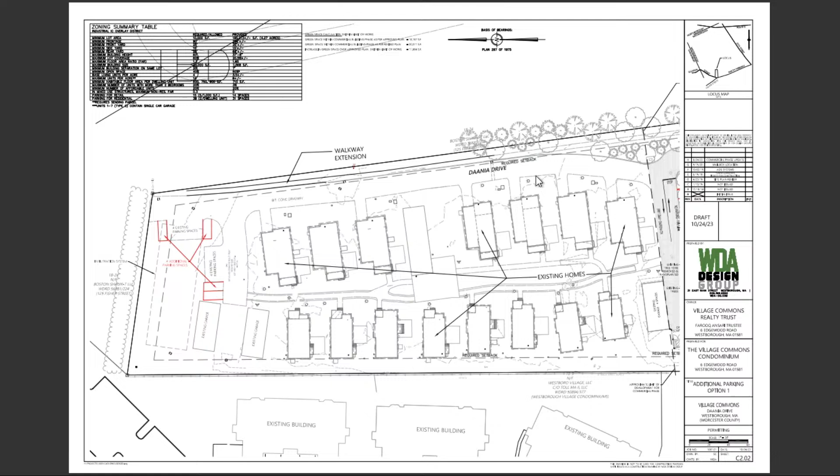And then in option 2, we can add more parking along the central green area. Here I'm showing the maximum number of parkings that we can add, so we can pick and choose if we only want to add the three towards the western edge of the green space, or we only want to add one, really depending on what the board feels right. But this is the maximum encroachment possible along the edges of the central green space.

Okay, questions from the board? Yeah, my question, out of pure curiosity, and I didn't get a ruler out or anything, but what is the distance between the parking in the front of the building, between the two sets of spaces where you've got four, and then across from that you've got four more? What is the distance in feet between those two? That should be 20 feet at minimum. So, yes, it should be. I'm just wondering. It is 20 feet.

Then you're also planning to put some trees in there? I mean, that's what the landscaping showed. So are you saying between these two spaces, the green space? So the new parking spaces, I think there's one, two, three, four, five of them right there. What's the distance between there and the four spaces there?

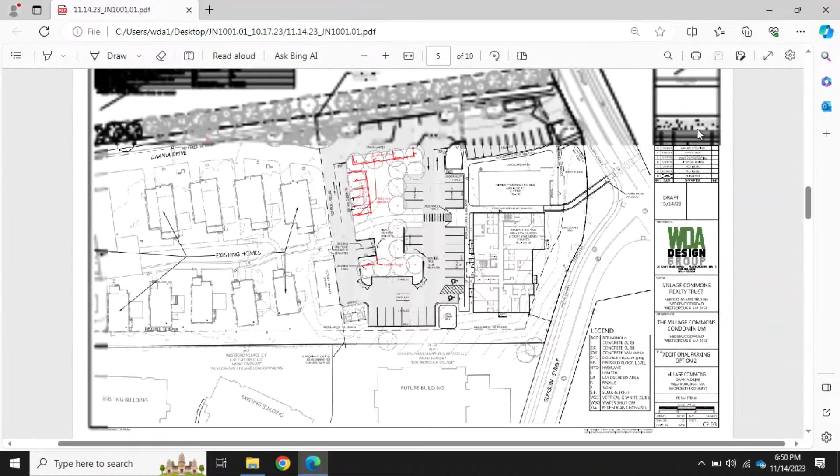I'm looking for the scale on here, and quite frankly, I was lazy and didn't take a ruler out. But I wondered what the distance was between those. Somewhere between 30 and 40 feet, I would guess. It should be around 35 feet. I think 30 to 40 should be a good guess. Right now, I don't have a scale.

Anybody know how far it is from here to the wall in the back? Is that 30 feet from here to there? That's further than 30 feet. I was just trying to visually get an idea. I believe from this wall to the entrance door it should be around 20 to 25 feet between the wall and the door of the entrance.

So between 30 and 40?

Showing off, John, you're showing off. All right, nice. Youngsters with their technological skills.

All right, so any questions? Do we have, I think we should withhold a decision on this until we hear public comments?

How many spaces are we looking to add, generally? Well, I'd like to hear public comments on how many of the existing residents would like. If the public comments say that they want to add all of these spaces, are we okay with that? Well, I don't think you can add all of them for the green space. You can only do option 1 or 2.

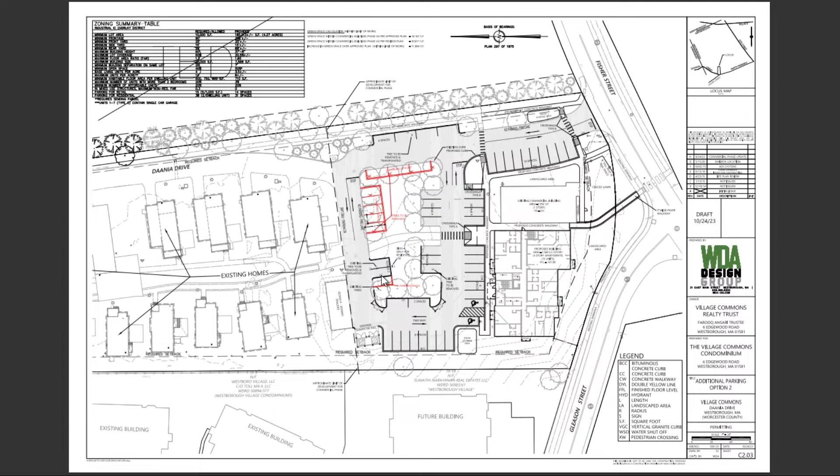If you look at that plan, you see the dumpster enclosure? You see that little dash line? It will be parallel to that on the other side of the roadway. Can you move your cursor to where the fence is gonna go? It should be on the inner side of the curb, yeah, along here, all the way up and down. Okay, all right, thank you.

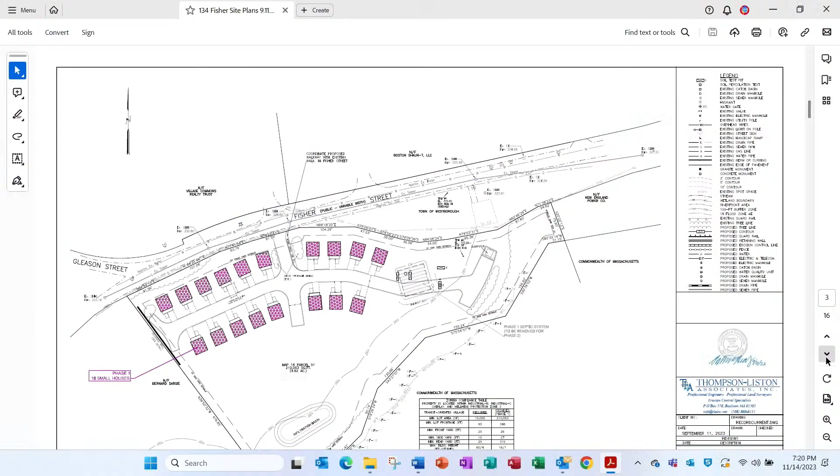If you could, Jenny, flip to the grading plan for phase 1. Each of the small houses would have a small infiltration system just to handle the roof runoff — those are the little gray areas you can see behind each building. Essentially it's the size of a 4x8 piece of plywood, but it's a number of small chambers that provide enough voids within the soil for us to contain the volume of roof runoff and let it soak into the soil. We've used it successfully on other projects and individual house lots. But because we have the sandy soil here, it's a great opportunity to maximize the amount of recharge from the clean roof runoff.

We are situating the sewer system so that we can make a gravity connection out to the town sewer main in Fisher Street in the future, without replacing what we're putting in place for the septic system. We're focusing everything down to that center spine road, and at the rear of the site the septic would be removed and replaced with a gravity line going out to Fisher Street, should sewer capacity become available in the future. The grades allow that to happen without a pump system.

Right in front of our site along Fisher Street, labeled as the Town of Westborough, there's a fenced-in area that has a sewer pump station for this quadrant of the town. The sewer coming down Fisher Street is quite deep, going into that wet well in the pump station, which leaves us the opportunity to make that connection.

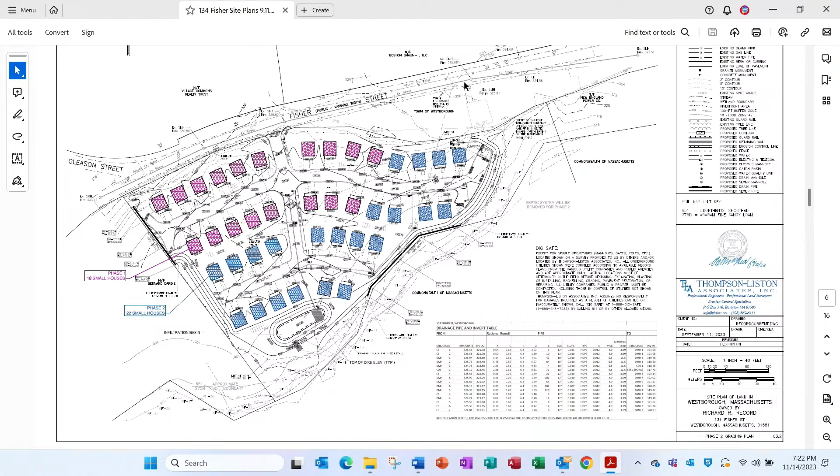The drinking water supply is proposed to connect at Fisher Street to the town water supply. There is capacity within that system as we understand it, and this is a pretty small user of water, having only one bedroom per unit — under 2,000 gallons per day. It doesn't put an extraordinary tax on the supply system. Even at build-out with 40 units, at 110 gallons per day, we're still under 5,000 gallons of water demand.

As for the electrical system, the question came up in review, and Mr. Record confirmed these roofs would be solar ready, although solar panels aren't proposed at this time. This service would be from National Grid, coming into an underground system with several transformers laid out. Because they're small users, we can get multiple houses off a single transformer — where in a single-family subdivision with 4-bedroom homes you might only serve 2 homes, here we can serve 4 or 5 homes off each transformer pretty efficiently.

As for street lighting, we're proposing that the sidewalk and spine road right as we enter from Fisher Street have a couple of street lights, but not go any further, in keeping with other single-family homes in the town. Each house would have a post light by the driveway to provide light onto the driveway and the common facility.

We had submitted a landscaping plan showing a dense planting buffer between Fisher Street and the rear of the buildings that back up to it. There are also individual street trees proposed scattered throughout, where we don't have conflicts with underground sewer, water, or electric. Some comments from Public Works asked us to shift some of these around.

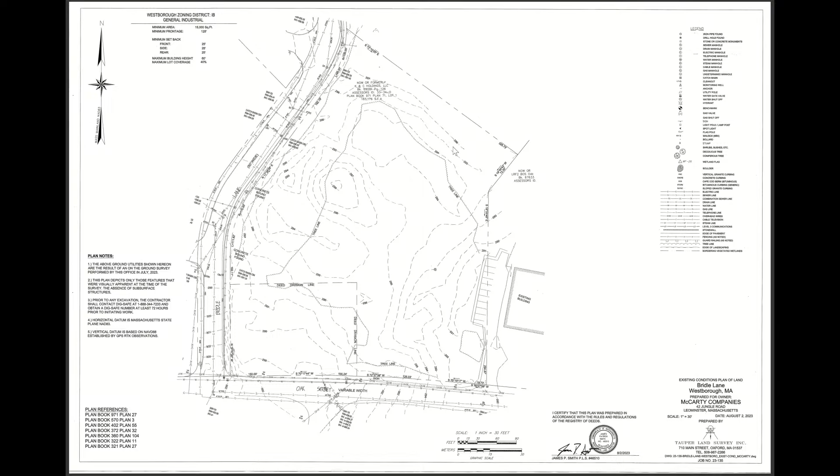We're proposing a covered canopy at the rear of the building. That canopy has a 16-foot clear height from the concrete slab below it to the lowest part of the steel, so that landscapers with trucks and trailers, fire department, and emergency vehicles can all drive underneath it in order to loop around the building.

We're proposing parking along the front of the building, with handicap spots and a couple EV-ready spots, and also an area we're going to pave with concrete rather than asphalt in case we're parking any of the larger equipment that Mr. Satterfield sells at the front of the building. There are 14 spaces along the side for staff, as well as some company vehicle parking there.

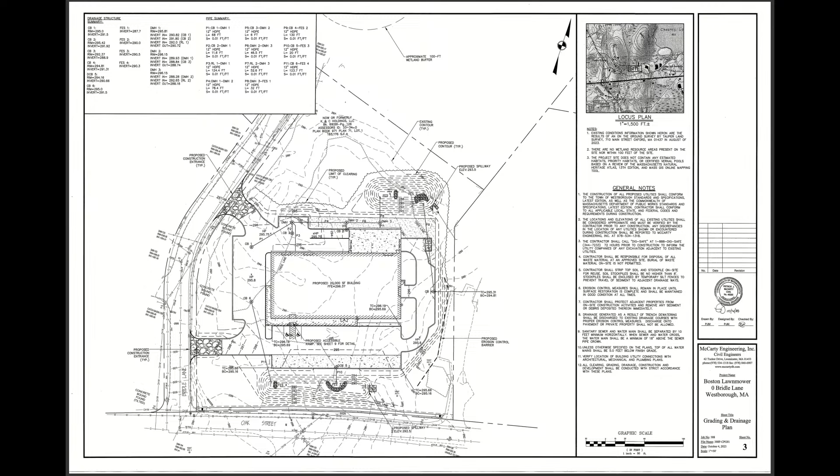The grading and drainage plan is pretty straightforward. We did soil testing, and not surprisingly, there's really nice gravel at the site. So we have a detention basin at the rear of the site that picks up the back half of the parking area and the roof runoff, and then another one at the front of the site that picks up the front half of the parking lot.

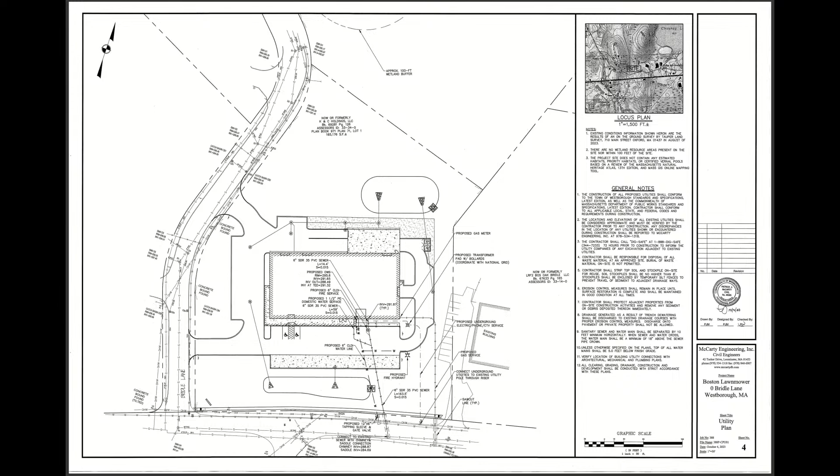The utility plan is pretty straightforward: underground electric to a transformer into the building, municipal water and sewer. There will be an oil water separator on the sewer so that any floor washing that gets into the floor drains of the service area goes through that oil water separator before discharging to the Westborough sewer system, and then underground gas.

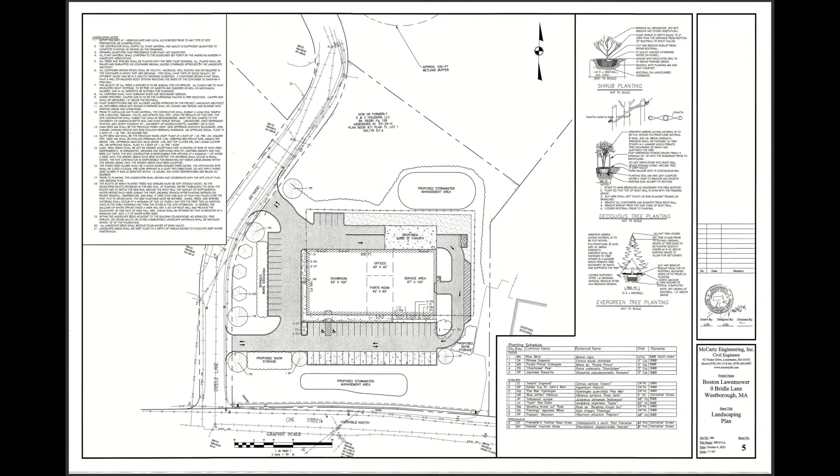For the landscaping plan, we're clearing all that scrubby undergrowth along Bridle and putting in five new street trees between the entrances, and one on either side, so we're reestablishing that tree line. There are also some nice mature trees we're going to maintain at the Oak Street side as we selectively clear that brushy area. Then we have foundation plantings at the building here and here, with a sidewalk running along the remainder of the front of the building. The landscaping schedule is in the bottom right corner if anybody wants to see what Lar had specified for that.

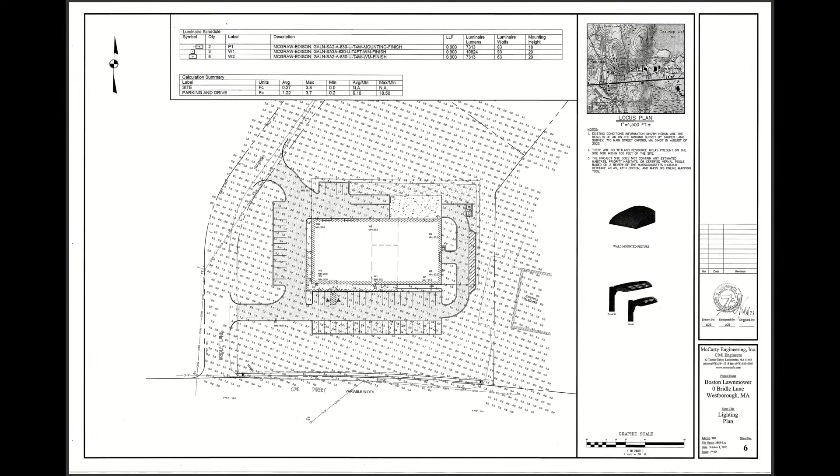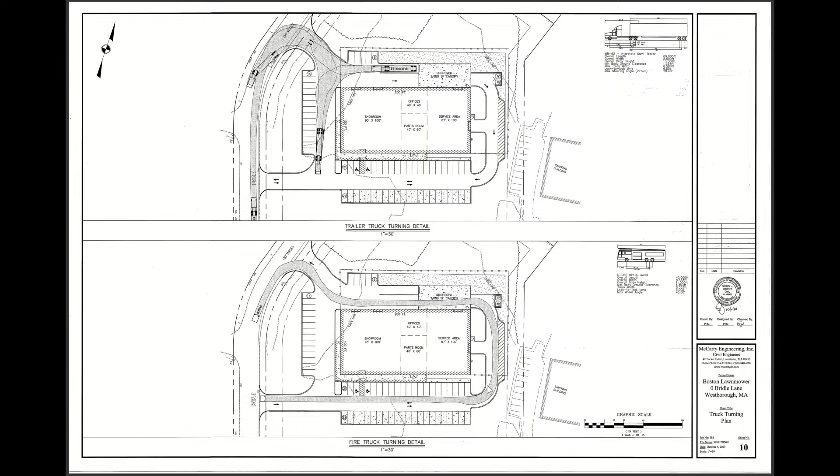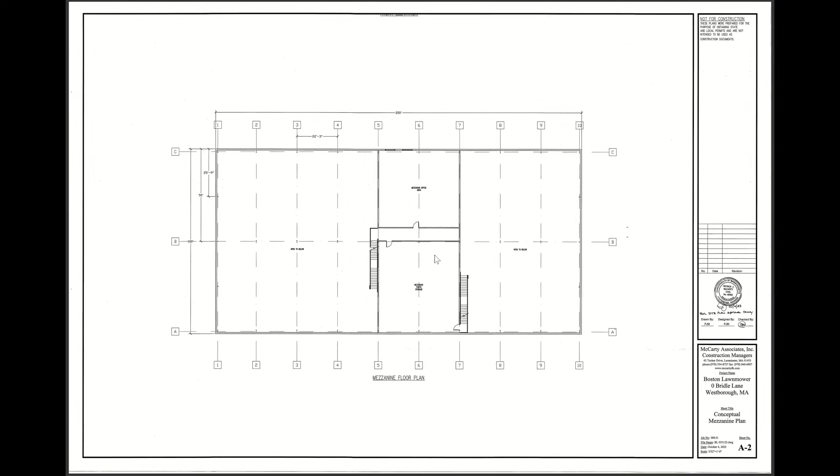Just a blow up of the floor plan again: sales area, parts area, retail parts counter, parts counter to service, the technicians in the service area, bathroom, break room, offices. There's a partial mezzanine at the center of the building, a small office area in the back half, and additional part storage for lighter stuff like chainsaws and weed whackers that can be stored upstairs.

That's the review of the plans. We did render it so you can see the amount of green space. The dark green is all the mature trees at the rear of the site that's being maintained, and the new street trees along Bridle. We didn't color the existing trees, but there's a couple nice oaks here, ironically along Oak Street, that we'll maintain. The rest is lawn and landscape area.

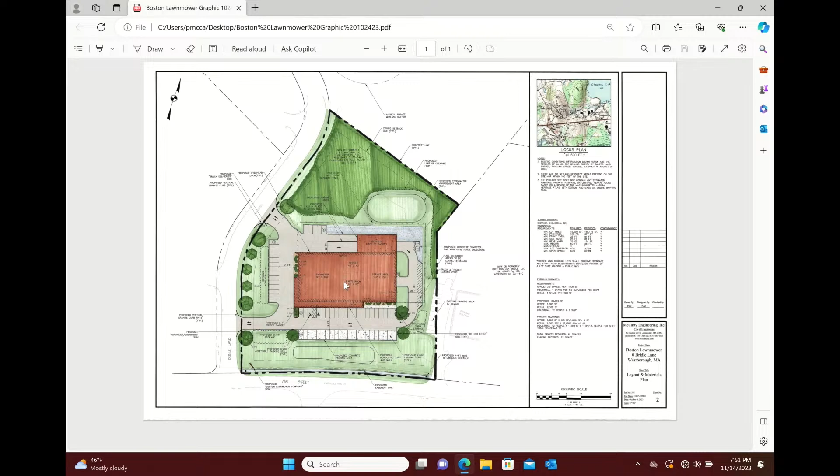Happy to answer any questions. Jenny did share with me the conditions of approval that she's outlined, and we have no concerns with any of those. DPW did ask that we change from currently proposing the sidewalk to reserving a 10-foot easement across the frontage for a future sidewalk or bike trail, whatever the town decides to do with it in the future, and we're fine with that. We'll have to do a little tweaking to the grades of the detention basin to make that fit, but no big deal. So with that, I'm happy to answer any questions.

Any questions from the board? Hazel, go ahead. One thing I mentioned last time when I was out there was the lighting. Now, you're going to put a sign right at the corner of Bridle Lane and Oak Street.

Yes, which I understand will be lighted, but I'm wondering about signage going in there and whether there'd be lighting. It gets dark at this time of year, people would still be going there. Yes, that's what I was wondering, some sort of lighting just at that entrance so people see that when they came up Bridle Lane, as to where to turn in there.

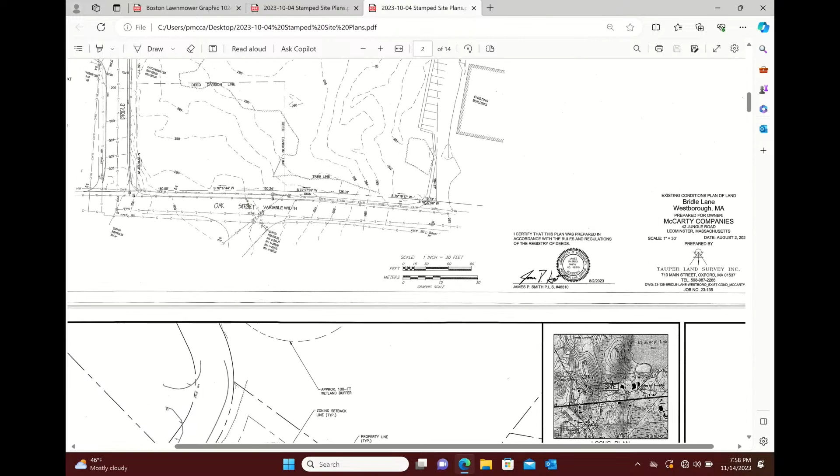I don't think I show it, but you've got parking spots facing them on the southern side of the site. I don't know if a truck is gonna pull in there and idle with their lights on and load onto the back. I just want some screening for a residential neighbor, so that they don't have aggravation from headlights. Okay.

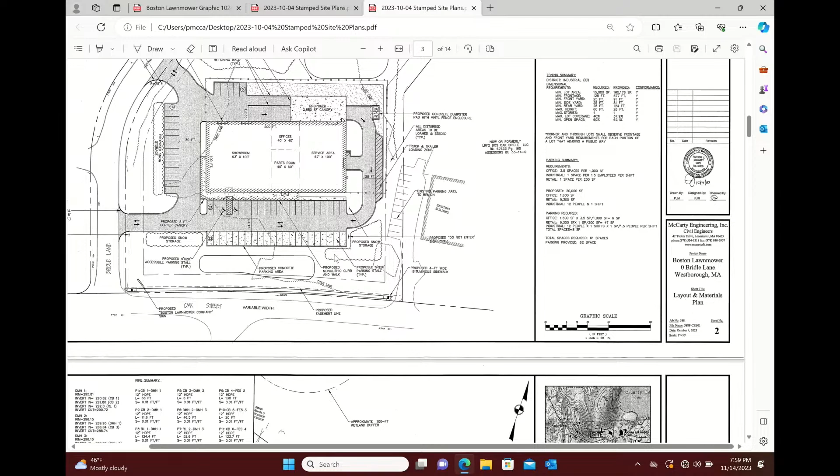Any other questions from the board? Jenny, anything?

I just want to make sure I have the additional items you are asking for: the contour photometric plan, and the additional screening added along the south side of the property line, not the front. It looks like there's a lot of screening along there, along Oak Street, but like you said, they're going to do selective clearing of that scrub, so I think it would be good to understand what is going to be taken down and what's going to remain.

I forgot to mention, my snow blower is being serviced by Boston Lawnmower. I don't consider it a conflict, but in the interest of full disclosure, I don't want anyone to think that I'm playing favorites. All right?

And the operation hours are the same as they currently are at their current location? Yes. All right, Jenny, did you have more questions?

The other item I wanted to touch on is that the applicant also stated that after talking to the DPW today, they would feel more comfortable with a 10-foot public access easement instead of the sidewalk, in case they plan for a future bike lane, road widening, sidewalk, whatever they decide to put there. I don't know if I would support road widening, but I would support a bike lane. All we're talking about is the easement, and we're not asking the applicant to do anything, just that it would be an easement that could be used for any purpose deemed by the town to be necessary.

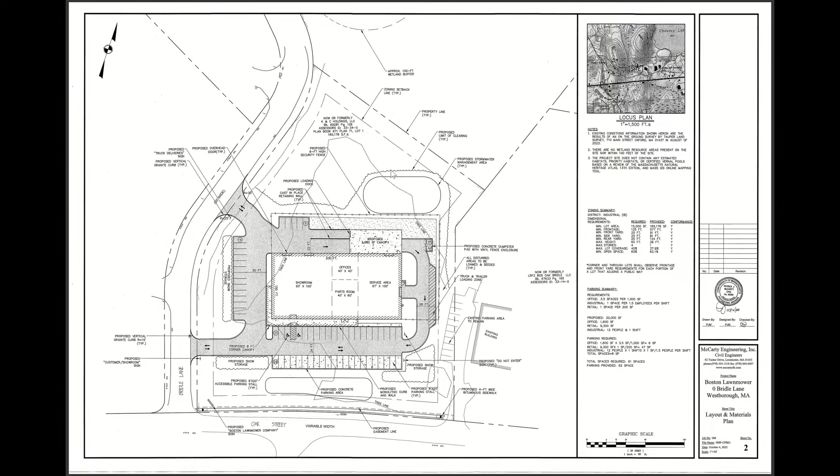The other thing we have concerns about, of course, is traffic. A lot of traffic. I don't know if the town could do a traffic study to see the actual traffic we get through there. The other thing is people go so fast, it's speeding there, so we're going to continue to have more problems with traffic.

So a traffic study on this project would only review the impact of this project on traffic — how many more trips it would create? I don't think it's necessary on something like this. Does anyone disagree?

Is the traffic sporadic, in other words? No, it's constant. But we're just talking about this project, out of Boston Lawnmower, and the traffic is sporadic. I realize the traffic is horrible because of the rink, because it's a cut-through, and because there are a number of businesses on there. There are so many reasons there's traffic on there, but I don't think this is going to make it substantially worse. And that's the only thing a traffic study would measure — will this use create enough traffic to substantially matter? I don't think it warrants a traffic study. I know it's got a lot of parking spaces, but that's only because zoning requires that.